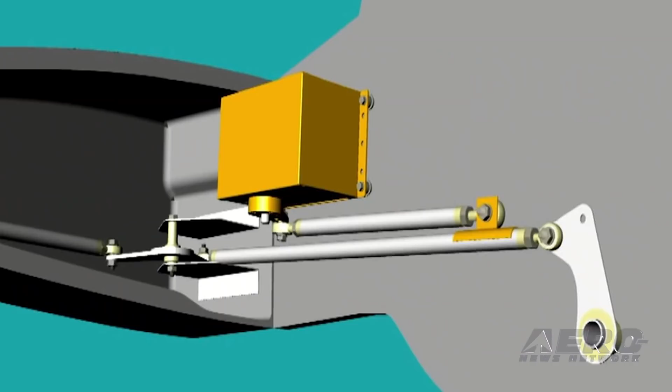Coming up on today's episode of Airborne Unlimited: Superior Air Parts grounds and buys back XP382 and 400 engines. PS Engineering introduces a new PAC45A audio controller. Cessna 190 and 195 added to STC Group AML.

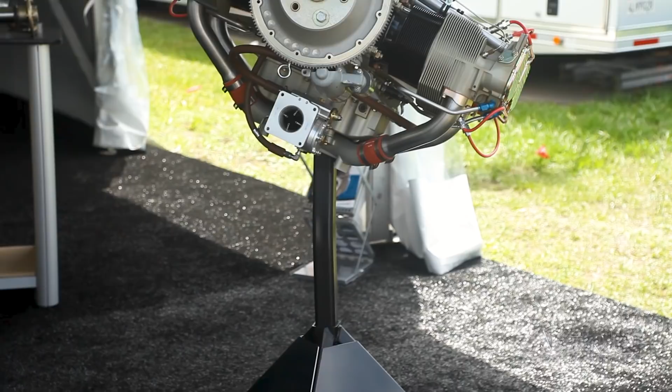In a decision affecting hundreds of engines, Superior Air Parts confirmed they are implementing a mandatory grounding and buyback of all their XP382 and XP400 experimental aircraft engines. Bill Ross, Superior Air Parts VP, explained the company's decision to take the engines out of the market comes after a lengthy evaluation and testing process.

He is quoted as saying, "When we first learned of the breadth of the detonation problem, we contacted the XP400 engine owners and paid to have them ship their engines to our facility for evaluation. We disassembled, inspected, and tested the key components in each engine."

Ross added, even after the company took all available steps to adjust the engine's ignition timing to reduce internal stress, the results were still unsatisfactory.

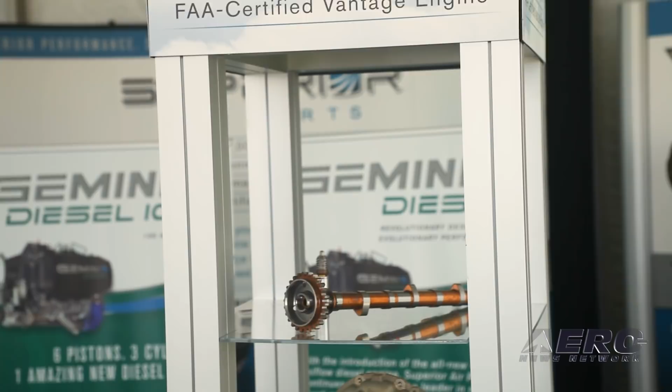While detonation problems are currently confined to the XP400 engines, the XP382 will also be taken off the market due to the shared internal components between the two engines.

Ross was quoted as saying, "I want to be 100% clear that the grounding buyback mandate does not include any XP320 or XP360 engines." After the break, Chinese Airline sues passenger looking for luck.

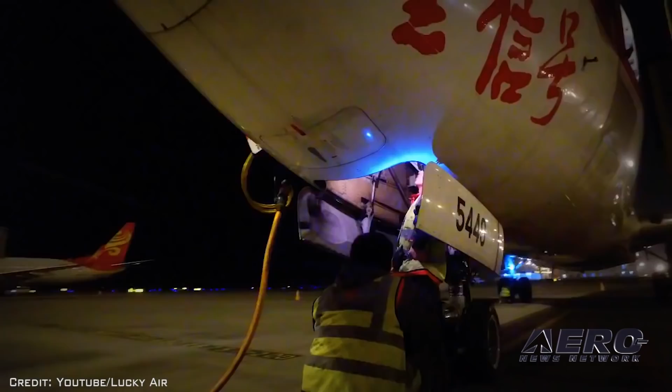Chinese carrier Lucky Air is suing a passenger who threw 2 yuan coins into the engine of an airliner he was boarding. The airline states the passenger's actions will cost them the equivalent of $21,000 and has affected 162 passengers. The flight was grounded and eventually canceled for security reasons.

The FAA has awarded Onboard Systems International the STC certificate for its dual cargo hook kit for the MD500 series. The cargo hook system meets 14 CFR Part 27 certification requirements for human external cargo and has been built around a dual installation of Onboard's Talon LC hydraulic hook.

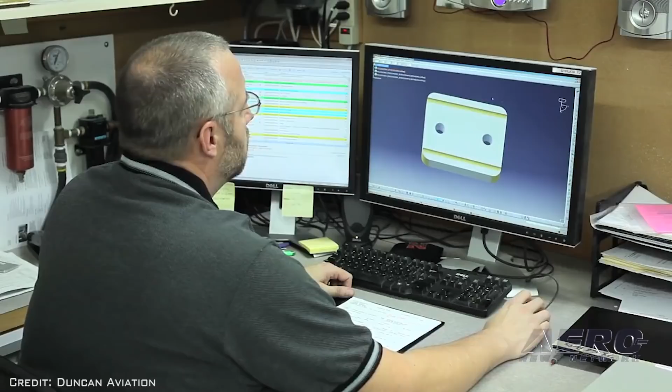Duncan Aviation's Engineering and Certification Services Department has created a searchable database of supplemental type certificates. This database is available for free and can be accessed at duncanaviation.aero/services/engineering. The Air Line Pilots Association International commended DOT's Pipeline and Hazardous Materials Safety Administration for issuing a rule that would enhance safety provisions for lithium batteries transported by aircraft in the U.S.

ALPA President Captain Joe DePete said, "This rulemaking is a major enhancement to U.S. safety and supports ALPA's long-held position that the shipment of lithium-ion batteries by air poses a significant safety risk." And that was today's Around the Patch.

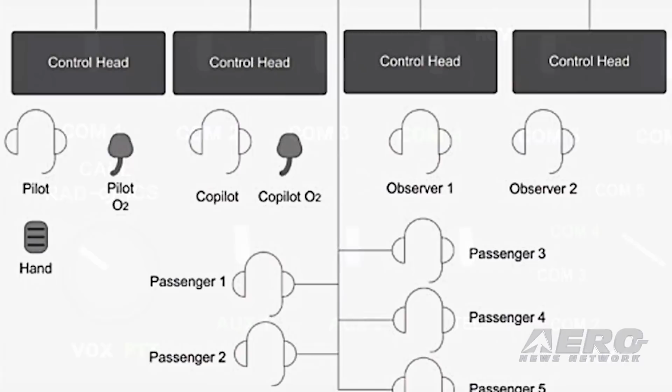PS Engineering introduced the latest variant of the PAC45, an FAA TSO'd special mission audio controller with MultiTalk. The result is the PAC45A, which accommodates up to 4 individual control heads, interfaces up to 8 comm radios and 8 switch receiver inputs, has FlightMate with 9 customizable audio alerts, and incorporates 2 built-in speaker amplifiers, all with a single interface hub.

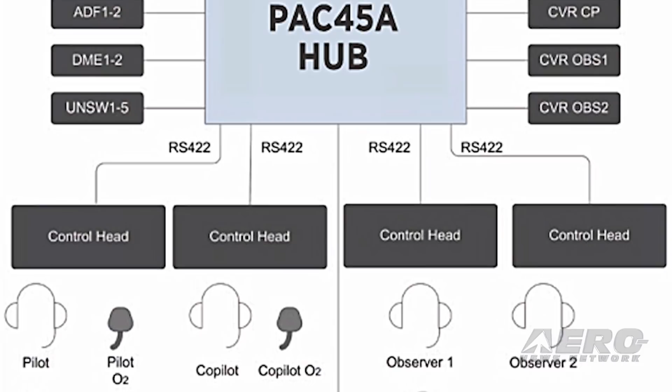The 9-place hi-fi stereo intercom has IntelliVox and PTT-ICS. A Bluetooth interface for wireless telephone and music streaming is available. To assure plenty of signal strength in the cabin, an external Bluetooth antenna is provided. Offside comm allows monitoring other comms when transmitting. The PAC45A also includes a radio receive indicator and comes standard with remote ICS and swap switch capabilities.

After these messages: Cessna 190 and 195 added to STC Group AML.

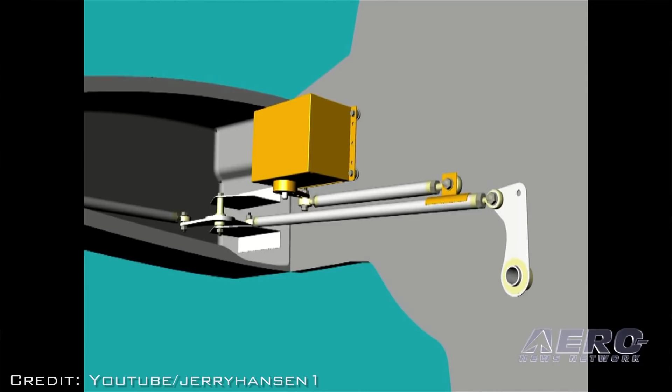The STC Group received an STC for the installation kit for the non-TSO'd Trio Pro Pilot digital autopilot into Cessna 190, 195, LC-126A and LC-126B. The Cessna LC-126 prototype airframe is in the Oxnard, California facility, and the project should be completed over the next month. The Trio Pro Pilot Autopilot reportedly brings a robust set of features at an affordable price.

The 2-axis Pro Pilot model utilizes roll and auto trim pitch servos to provide precise horizontal and vertical navigation capabilities. Altitude control includes climb and descent functions with altitude pre-selected. When connected to WAAS-enabled GPS, Pro Pilot can fly the lateral and vertical portions of RNAV approaches and other procedures. The digital autopilot also provides flight envelope protection, while an automatic 180-degree turn feature can also guide VFR pilots out of weather encounters.